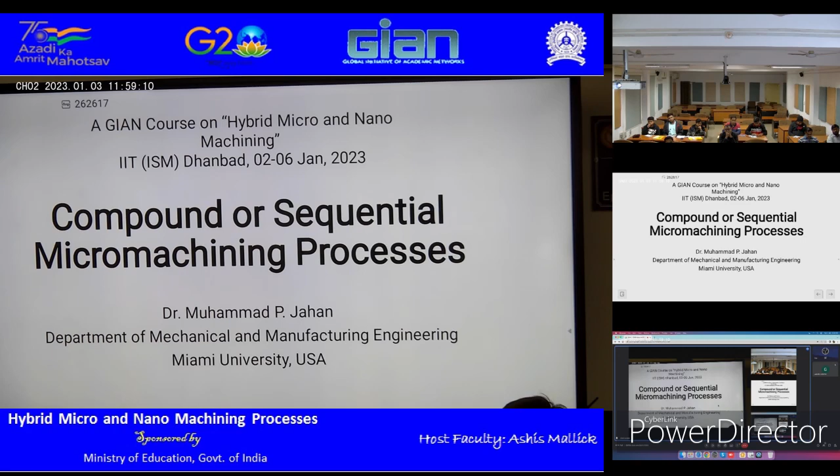I have actually created all the lecture slides from all my publications, or publications with my students and others. Those are actually book chapters. I've done some individual research on individual different processes, but most of those are book chapters. Since this is a course, collecting information from book chapters will help. So I will be happy to share all those book chapters with you. Those are already published, but I will also share the course materials.

Yeah, so let's move on.

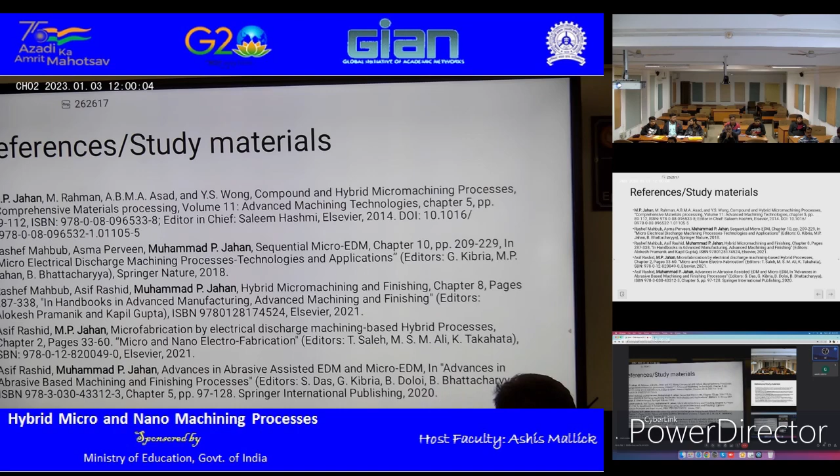Is it echoing a little bit? No, sir. Is it okay?

Okay, so in the contents, as I mentioned, we're going to cover about 15 different compound or sequential machining processes. Sequential means one process after another, and simultaneous means both processes are working together. So in today's lecture, we are going to cover sequential processes.

So we have micro EDM with micro turning, micro EDM with micro grinding, micro EDM with micro milling, micro drilling. All those are mechanical micro machining processes combined with micro EDM. Then we have micro EDM with some other non-traditional machining processes like micro EDM and micro ECM, LIGA and micro EDM, laser micro EDM, micro EDM with laser welding, then micro EDM milling and laser ablation.

Laser will work here, but this is also not working. No, this slide change is not working also, but it's okay. But yeah, you can work on that. But I can use this to continue, so should be okay.

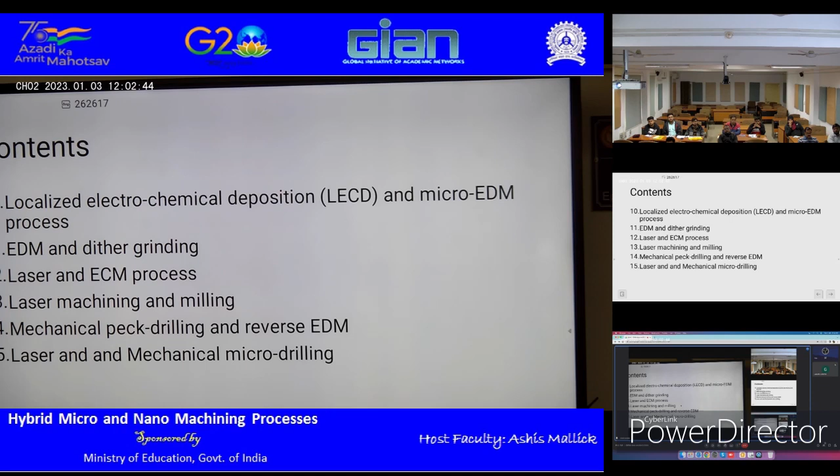So I don't know, how many of you are familiar with different machining processes? I just want to make sure so that I can know how much detail I have to go into.

Mechanical micromachining processes like micromilling, turning, drilling - all of you are familiar. What about micro EDM? Okay, so some of you may not be familiar with micro EDM. Let's try to spend a few minutes on micro EDM, because many of those processes have micro EDM. So what is micro EDM?

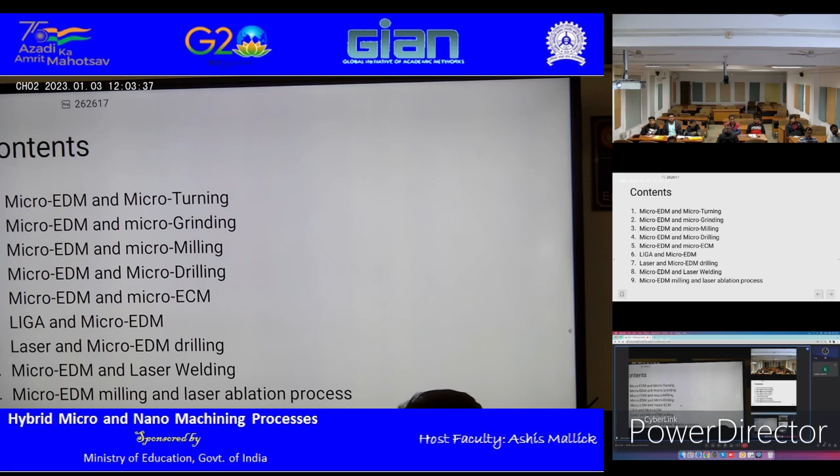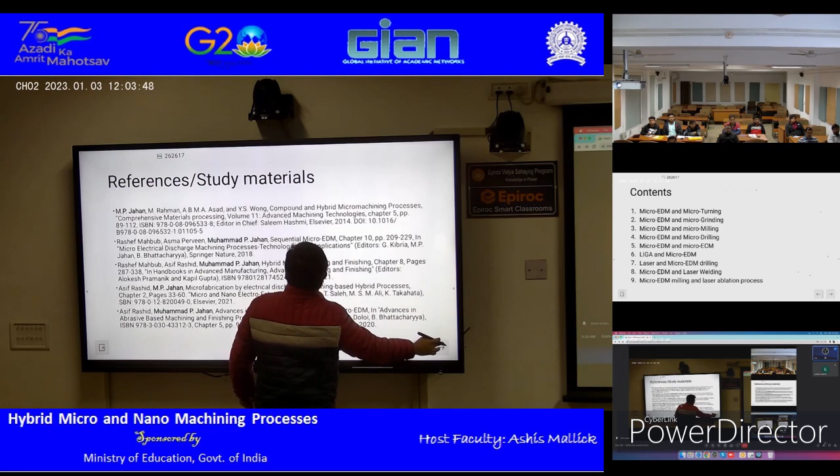Let's start with what is EDM. So let's start with what is EDM process?

So EDM stands for electrical discharge machining, or electro discharge machining, or electric discharge machining. People talk about it differently - sometimes electrical discharge machining, sometimes electro discharge machining or electric discharge machining, but it doesn't matter. Let's talk about EDM first.

EDM was actually invented during the Second World War, when the war was happening and there were lots of heavy things, and also some of the metals are very hard, and you need to remove those, you need to machine those. I think the inventor, I cannot remember on top of my head, but it's a Russian inventor - I think Lazarenko or something like that.

They came up with an idea of removing material with electrical sparks. So the material hardness doesn't play a role here. All you need to do is, for example, if this is a tool holder, then you will have a tool.

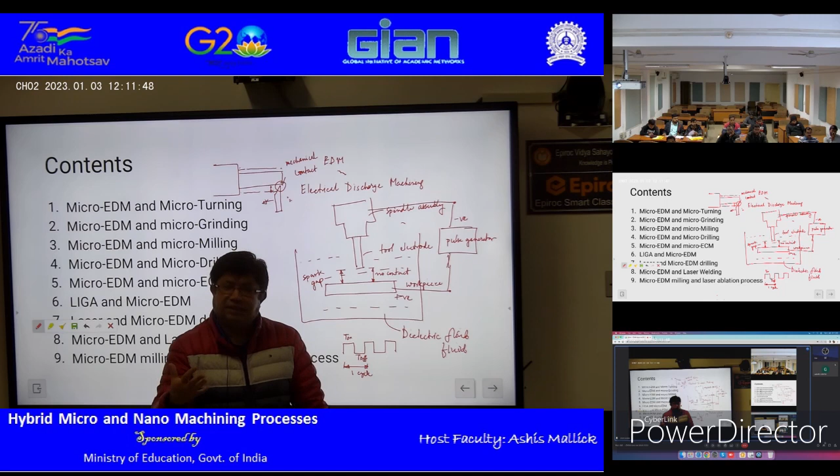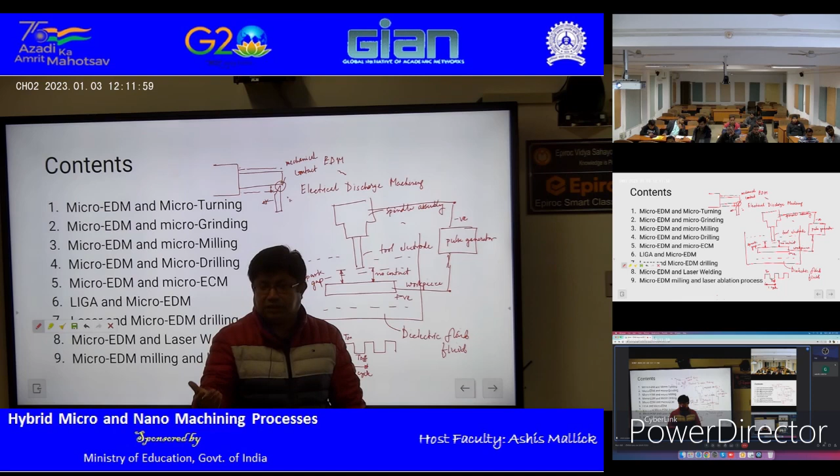Whereas here, there's no contact. That's the specialty of the EDM or micro EDM process - the tool never touches the workpiece. There is always a spark gap maintained between the tool and the workpiece. So it doesn't matter which one is harder - you can use a softer tool to machine a harder material. That's the main difference between EDM and conventional machining process.

Now let's talk about micro EDM. Yeah, let's talk a little bit about micro EDM.

Okay, yeah, then I can use this space.

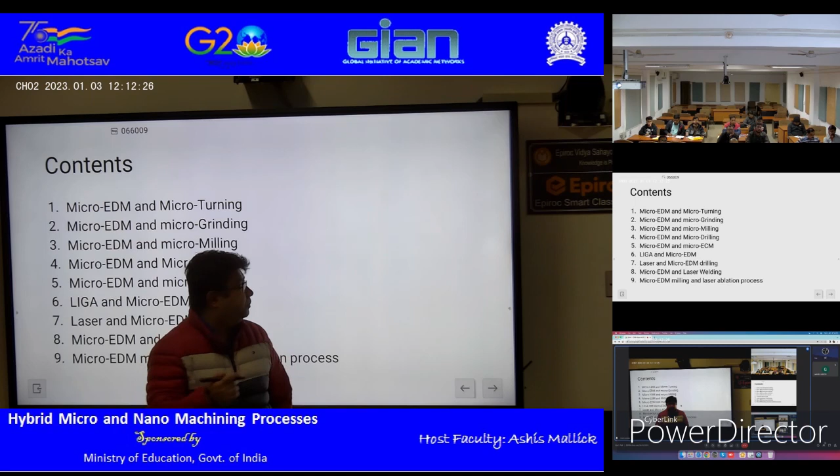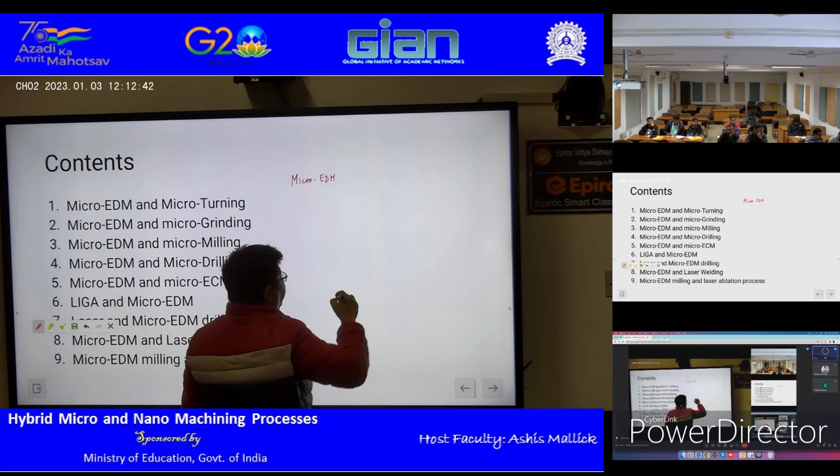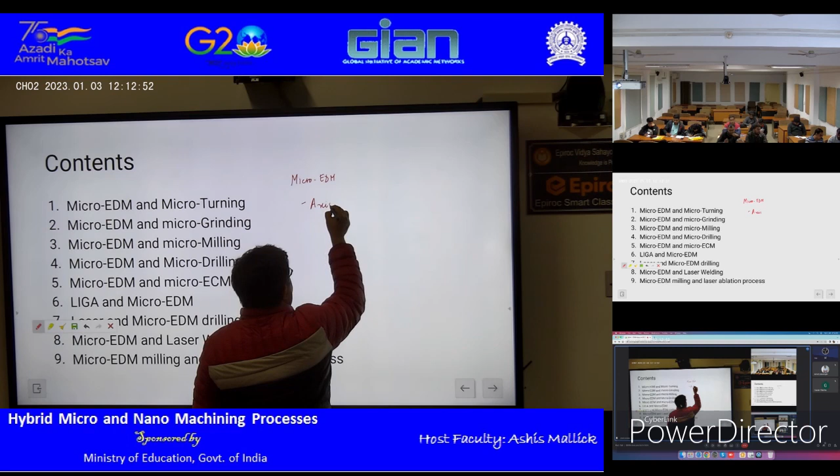So let's talk about micro EDM. Micro EDM is a miniaturized version of the EDM process. That means the axis resolution, tool size, and energy used are all in the micro scale, so you're talking about 1 to 999 microns. That means anything less than 1 millimeter is micro machining, micro scale machining. But remember, there are other differences also.

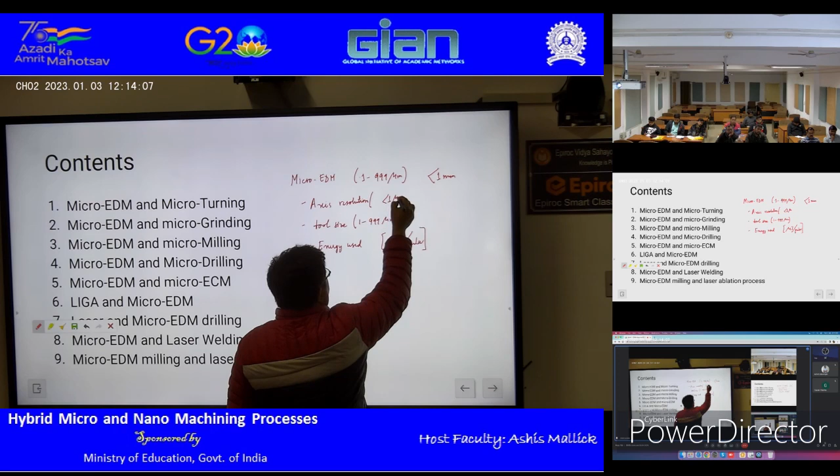It's not only the axis resolution or discharge energy. Discharge energy is in microjoules per pulse, so if you calculate the discharge energy, we'll talk about how to calculate that when we cover EDM. Tool size is 1 to 999 microns. Axis resolution is usually sub-micron, less than 1 micron, so the axis resolution is very small. Those are kind of the features of micro EDM compared to conventional EDM.

But there are other things that also play a role in micro EDM, so it's not just those. Micro EDM has become an independent process, and some of the characteristics are slightly different than the EDM process. But that's basically the micro EDM process.

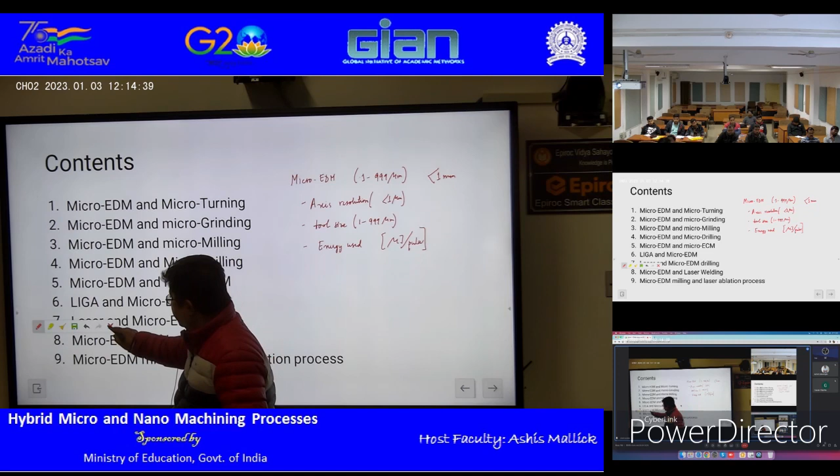So I think from there we can start covering a little bit more about different processes. Now you're a little more confident about EDM and micro EDM, and you already know the mechanical micro machining processes. So in this section, we're going to cover how micro EDM can be combined with some of the mechanical micro machining processes to solve some of the challenges faced in micro machining. Later, I'm going to cover the remaining processes, where you can combine almost any process with another to come up with new compound processes.

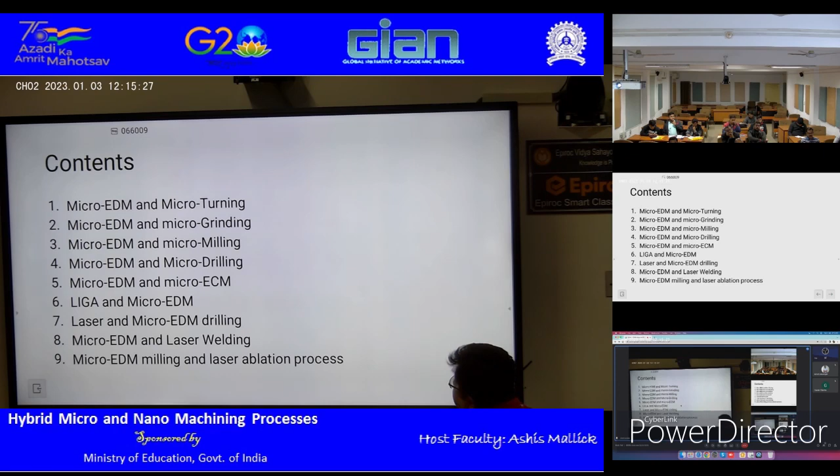So let's start with micro EDM and micro turning. I've arranged these in a very similar way. Although it's a little monotonous, I think it will help us think more in the same way for each process. First I'm going to cover why you need that process. Definitely, as I mentioned, all the sequential and hybrid processes come about not because people are just trying different things. It comes when you face a challenge and think about how to solve it. That's when you think about other processes that can actually solve this, and how you can combine two processes.

So, the micro turning process. The conventional turning process is a very well-established process. In your undergraduate machining course, you mostly spend time on the turning process. I teach manufacturing processes at the undergraduate level, so I know we cover most machining content on turning, then a little on other processes, because from turning you get the orthogonal cutting model, which applies to almost any machining process. When people started using micro turning, there was a lot of research to do, like modeling cutting forces, tool wear, and modeling microstructure changes.

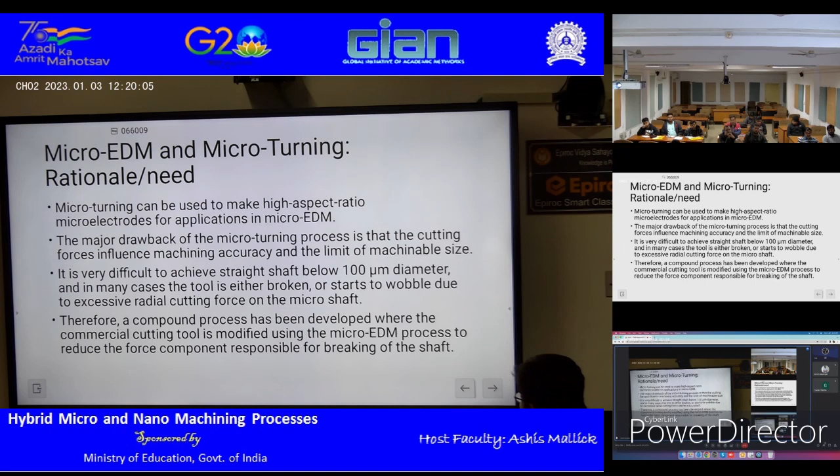If you look at a conventional cutting tool, usually if you use an insert, or maybe you just use a regular turning tool, any regular turning tool has a tool nose radius. So this is your tool nose radius.

Remember, we are using microturning and micro EDM in the same setup. So instead of horizontal turning, we use vertical microturning. That means we have a tool holder, and then we use a bar that we want to turn down to make the micro electrode. Then we use the microturning process.

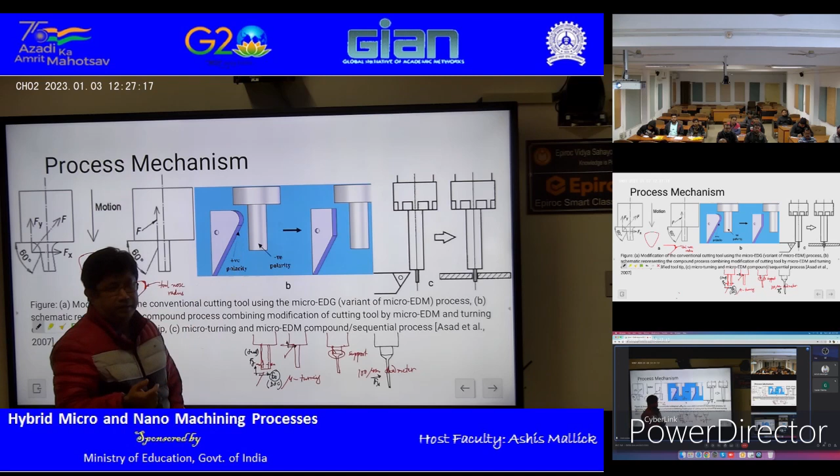So in the micro EDG, I use the tool as the workpiece because I want to remove more material from that tool—so it's just reversed. You can use micro EDG to do the dressing, because remember you will have Fx here and Fy here. So what I'm doing is trying to get rid of this section. Here I already got rid of that section, so I'm eliminating Fx and will have mostly Fy, okay?

That means you do the turning process up to 100 micron using this tool, and then you do the electrode dressing, and you start machining with this. So now you have your tool here.

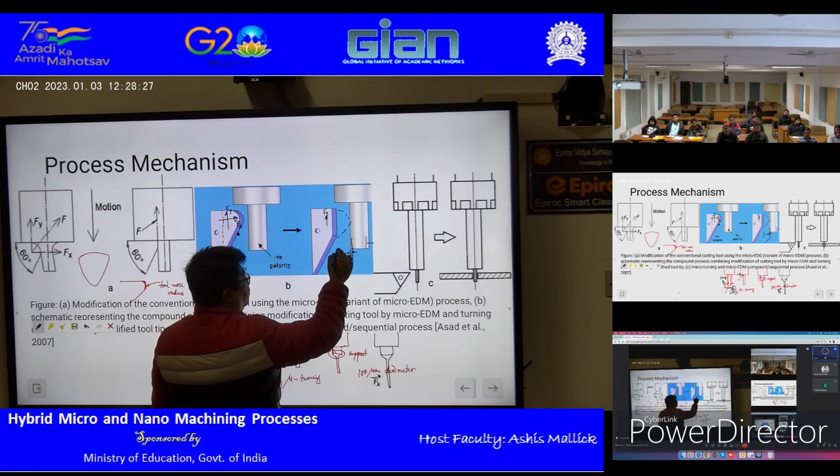So now you are trying to remove material using this, right? You try to get rid of material from both sides, and you try to move this. So you will have Fy, but you are getting rid of mostly Fx, and that will help you achieve up to 20 micron. Remember, our hair is about 70-80 micron, so you can achieve 20 micron without any bending.

Now we try to push the limit. After that, even Fy force can also bend that. So after that, we also used another process, which is block micro EDM—it's non-contacting, to bring it down to 5 micron or something like that. We'll talk more about that EDM process. But for micro EDM and turning, we'll just stop at that 20 micron, and then you have the electrode ready, and you bring it to the workpiece.

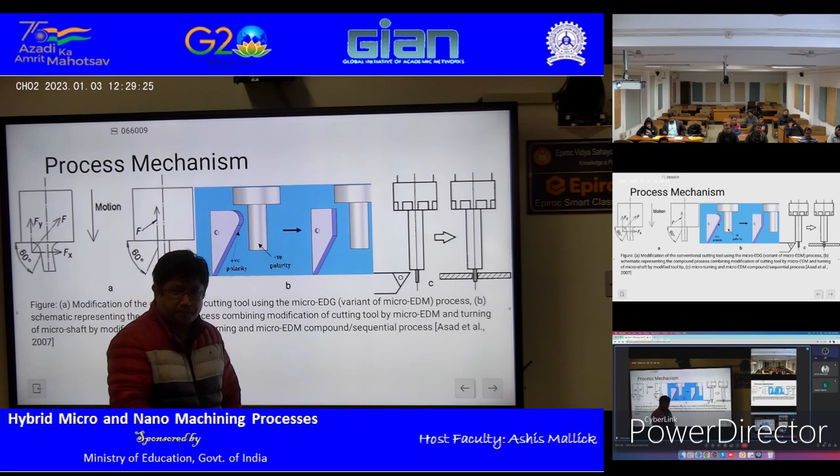Again, change the polarity, and you do the micro EDM drilling process. So that is kind of the process mechanism. Any question, anyone so far? Okay, so that's kind of the process mechanism.

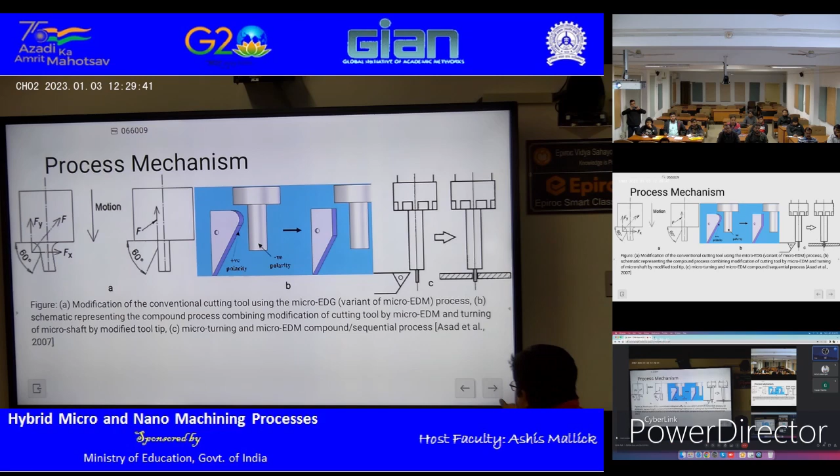Now, as I mentioned, you can see this is one of the electrodes, machined about 20—it was about 22 micron. The brass electrode was done by the micro turning process using the tool, and also then using the modified tool. Remember, the turning tool itself was modified by the micro EDM process also. So you are using micro EDM process for electrode fabrication and also for machining.

Now, how were we able to get 6.5 micron? Once you have that about 20 micron tool, the micro turning process with the modified tool has a limitation—the Fy force comes into play and tries to break it. So you can use a non-contact process again, which is block micro EDM, and we'll cover block micro EDM when I cover the micro EDM lecture. You can further bring down the tool to about 5 micron, because there's always some spark gap between the tool and the hole.

And that 5 micron tool, you should be able to machine about a 6.5 micron hole. Now, there is another process in micro EDM we call self-drilled hole—that means the hole you machine also causes some electrode wear, which reduces the tool electrode. So that means if you machine multiple times, your tool is getting shorter also, and that helps you achieve smaller holes.

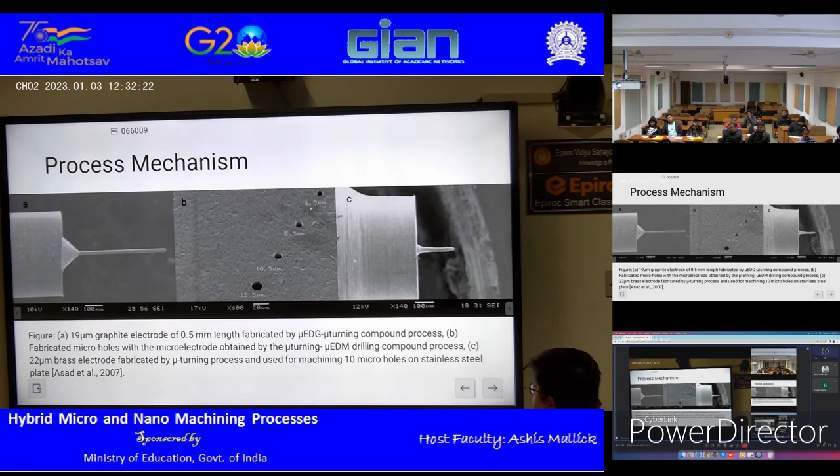So, the process capabilities—as I mentioned, using just regular micro turning, you can go up to 100 micron, with an aspect ratio maybe around... if it is 100 micron, then maybe you can go up to 3 millimeter or 5 millimeter or something like that.

After that, it will start to break or bend. Then what you do: you do micro turning with the regular tool up to 100 micron, then use a modified tool where you get rid of that FX component, and you can go down to 20 micron. After that, you need to use the block micro EDM process.

So block micro EDM, I can probably briefly show the process here. Some of you may know, block micro EDM is kind of, again, I would say micro EDM turning. So we use a block. For example, this is the block, we call it a sacrificial block.

Sacrificial block. And then you have that tool with the tool holder. This is probably too much, I am trying to remove at one step, but just consider. So this will work as the depth of cut for the EDM, right?

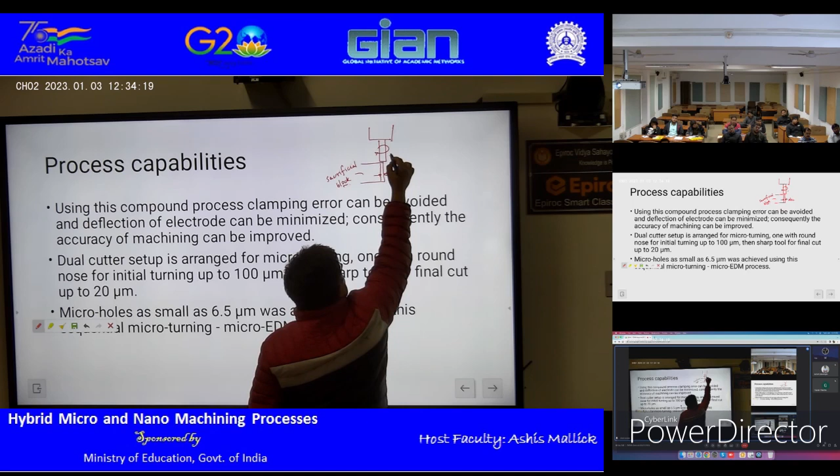And the same way that you did the turning with the modified tool, you are actually rotating this, and you are changing the polarity. So this is your positive, this is the negative, so that more material is removed from the positive side, right? That's my workpiece. And then you just do the turning process, bring it down. But this time there is no contact, because this is the EDM process, there is no contact, so the tool electrode will not break.

But still, there are some electromagnetic forces during the EDM process. If you go down more into the sparking phenomena, there are... sorry, what I mentioned - yeah, so there are some electromagnetic forces that can also limit, but you can go up to 5 micron, 10 micron if you do the block micro EDM process. So this is your block micro EDM process that you can use.

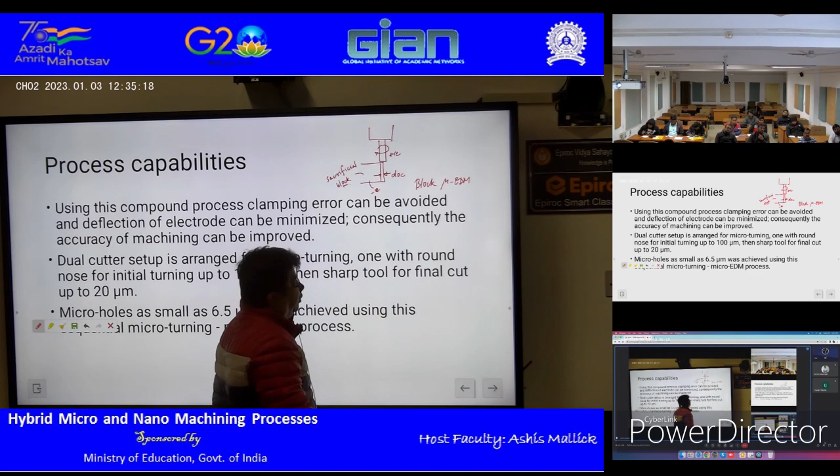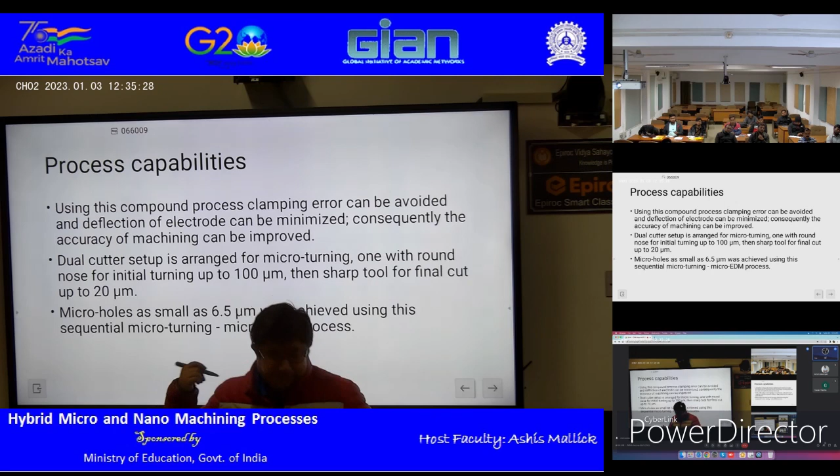I went a little bit deep, more in depth for that. So using that combination - you have turning, micro turning with modified tool, block EDM - you can actually achieve micro-holes as small as 6.5 micron.

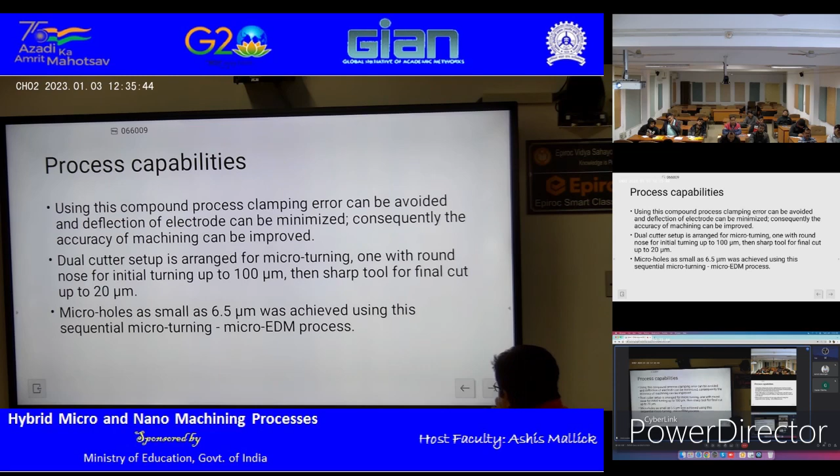Now, challenges. Spindle runout is a very big challenge. You are trying to achieve 5 micron, and when you start with the 3 millimeter or 5 millimeter tool, initially the spindle runout error is maybe 5 micron. But definitely when you start to do the micro turning, and if you don't take out that tool for the entire process, it will allow you to go up to that 5 micron, 10 micron level. So it can really go there.

So now the challenges are cutting forces, spindle runout, then the modified tool itself, then the 6.5 micron hole we machined - but I remember the aspect ratio was very small, because in order to machine a deeper hole, you need higher aspect ratio tools. So higher aspect ratio tools with a smaller diameter is again a challenge, and more research can be done in this area.

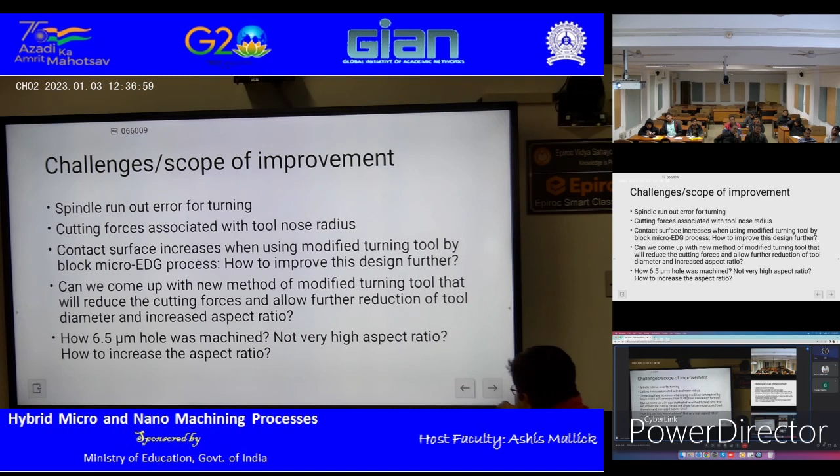So this is one of the processes, but I think the next one will go a little bit faster, because it's very similar. So now let's talk about the micro grinding process - micro EDM and micro grinding process.

So the rationale: in the traditional grinding process, what we have are grinding wheels, right? We have grinding wheels where the abrasive particles are actually connected with the metal matrix. And then you can use that as a grinding wheel.

For micro grinding, it's kind of a little bit different from micro milling, but it works in the same way. So for the micro grinding tool, you have something very similar to a milling tool. So you have the milling tool, and then at the end of that milling tool, you have this portion for the grinding. So this is kind of the grinding wheel, okay, so micro...

So, micro grinding wheel. You use a grinding wheel at the end of the tool. It kind of works like milling, but you can use that as a grinding process.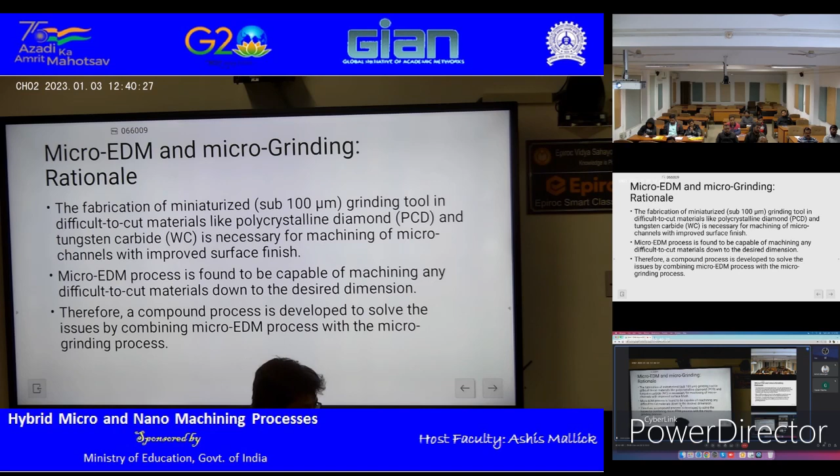There has been some research on that, and I have done some research on this as well with one of my colleagues, Asma Perveen. She's a faculty member at Nazarbayev University now. I remember we did some work on the micro grinding process.

Now let's talk about the process mechanism. You start with a commercial micro grinding tool. This is a micro grinding tool - it has a tungsten carbide base, and the black portion is the grinding wheel, where you have polycrystalline diamond with some nickel binder, or sometimes tungsten carbide binder. So this is your micro grinding wheel.

Now, if you want to use the grinding directly, this surface - the micro grinding surface - is just too smooth. This is the micro grinding wheel. Sometimes when they prepare it, all those diamond particles are not protruded, they're covered by the metal matrix, so it is very too smooth.

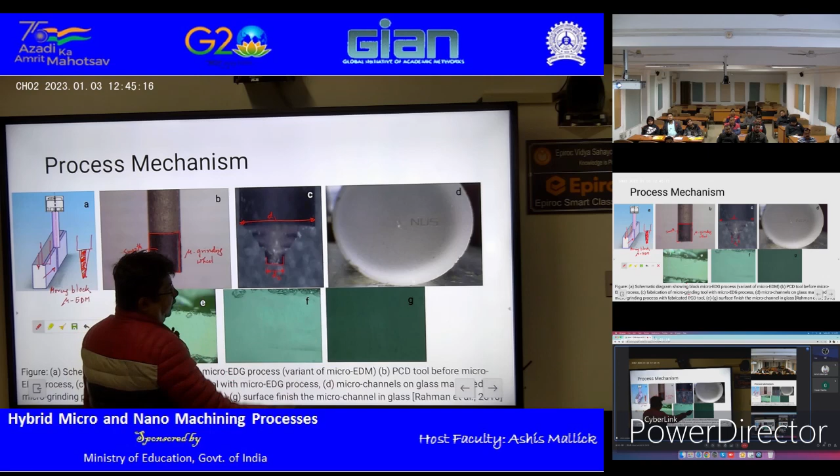Just like glass structure. Now here you can see the surface finish, definitely a very mirror surface finish that you can achieve.

Okay, so this is the process mechanism for micro EDM and micro grinding. Now let's go through how the process mechanism works.

Remember, the grinding wheel is made of diamond particles, and then it has nickel as a binder, or sometimes the top portion is tungsten carbide tool. Sometimes you can just use the same tungsten carbide as a matrix. Diamond particles are non-conductive electrically, so that when you machine it, there is no machining happening on the diamond particles, but the nickel binder material is removed from the tool.

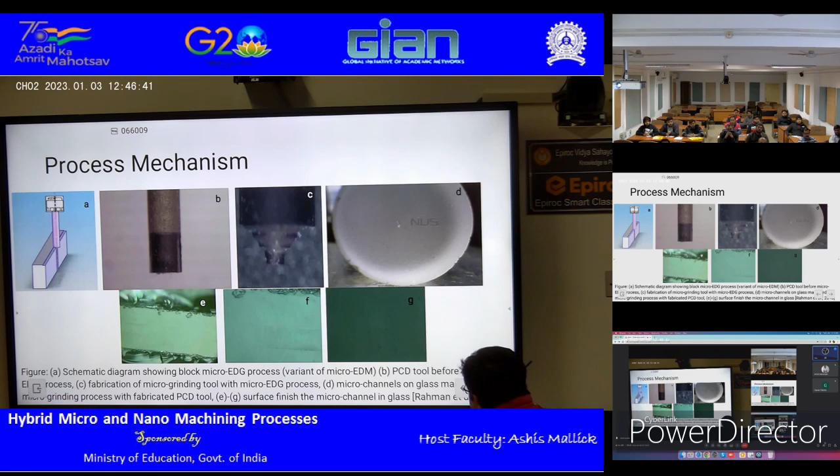So what happens? The diamond particles actually protrude, right? It becomes more protruded, and then when you do the grinding, those diamond particles are playing a role in the grinding operation. Okay, so that's how the process mechanism works. I think I explained that here.

Now I'm going to show several papers. It is not only our group that worked on this process - other researchers also worked on these processes. So you can actually be innovative, right? You can use the micro EDM process or micro wire EDG process. For the previous one we used block EDM process.

This author, I think he was at University of Kentucky at that time, used a micro EDG process to bring the tool diameter down - the tool tip is about 5 micron, and all the protruding things are diamond particles. Then you can use those to machine or do the grinding process.

This one is very similar to what we did, but it brings down the diameter from about 50, maybe 60-70 micron, and then you can do the micro channel.

One application can be microfluidics, right? You use micro milling for microfluidic applications, but the channel surface finish would definitely be much better if you use this process, because it's a grinding process rather than a milling process. Remember, in milling you are cutting from the side, but in grinding you are cutting both from the side and from the bottom.

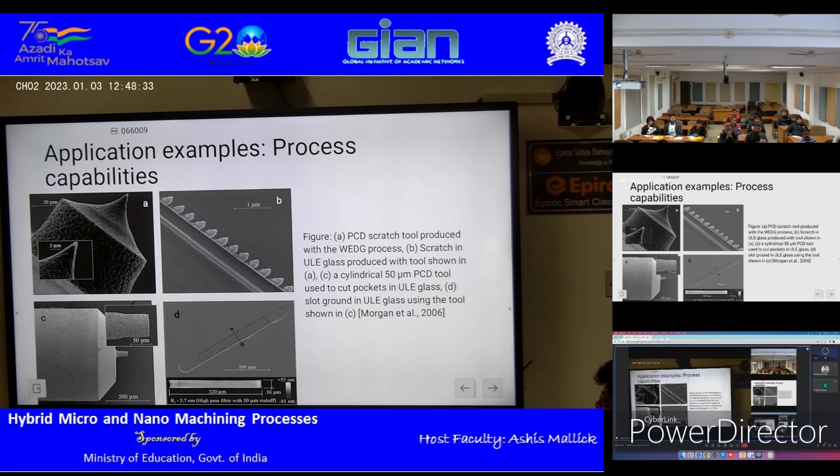Any question? Okay, so definitely you can use this process for microfluidic applications. I worked on this with my colleague, Dr. Asma Perveen. As I mentioned, you can be innovative and try to come up with different shapes of tools and see the grinding performance.

So we designed a fixture so that it's easy for the block micro EDM. It's not a simple block only - it has different angles so that when we do the block micro EDM, it is easy to get some of those shapes. We made circular, triangle, rectangular, D shape, and conical shapes of the grinding tool. All of those are grinding, and you are doing the machining on that grinding wheel portion.

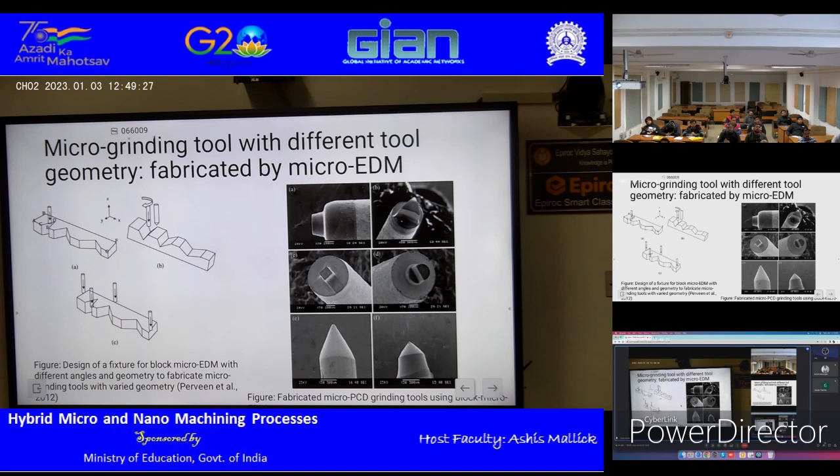And then you can use that for different applications and see what happened to the cutting forces and surface finish. We found that the D shape grinding wheel actually performs slightly better than other grinding wheels. We just made some channels, didn't try complicated shapes, but for regular things, I think the D-shaped tools work better than other tools.

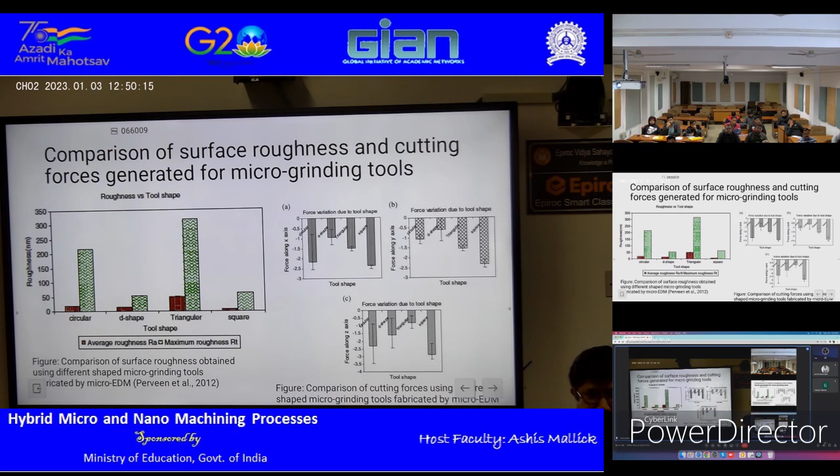So again, this is just a variation of the process, but the basic mechanism is the same - you are combining micro grinding and micro EDM process to achieve some goals.

Challenges - one challenge is, remember, you are removing the binder materials, so some of the diamond particles may loosen, and when you are machining they can come out. That's a challenge, especially when you try to go too small - one author tried to get a very sharp 5 micron tip. Sometimes the particles loosen, and if the particles are not there, what's happening is rubbing of metal matrix instead of grinding.

You have those fine abrasives that do the grinding process, but if the fine particles are not there, you are just using a metal piece - it's kind of a rubbing action mostly. So that is something with scope for improvement.

And also, all those processes have a lot of things still to do. As I mentioned in the last class, before the trend for additive came, micro and nano machining was the trend, but it didn't reach maturity, and then additive came and took its place. So there are a lot of things still to be done in those areas.

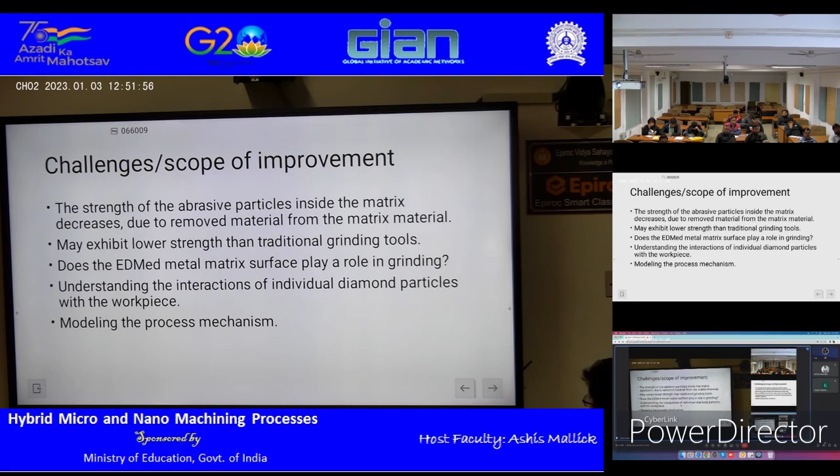Micro-EDM and micro-milling tools are fabricated similarly. As I mentioned with the micro-grinding tool, you fabricate the tool just like the micro-milling tool. Now, why do you need that?

Micro-milling has made lots of advances. There are micro-milling tools available down to 20 micron. So if you need it, micro-milling has advanced a lot and you can go up to 20 micron. But consider, if your micro-milling tool is limited to 50 micron only, and you want to go to 5 to 10 micron for micro channels, how can you do that?

Because commercial micro-milling tools at that scale are not available, you can use the micro-EDM process, or micro wire EDG, or block micro-EDM process, to produce micro tools from difficult-to-cut material like tungsten carbide, and then use that as a micro-milling tool to make micro channels.

But remember, when making the micro-milling tool, you need to ensure a shearing action is taking place, not rubbing action — otherwise it's not doing milling operations. It can also get rid of error due to clamping. Even if you have run-out in your spindle when you put in the micro-milling tool, when you prepare the milling tool in situ, you get rid of that spindle run-out error. So that's another advantage of combining micro-milling with micro-EDM over the traditional micro-milling process alone.

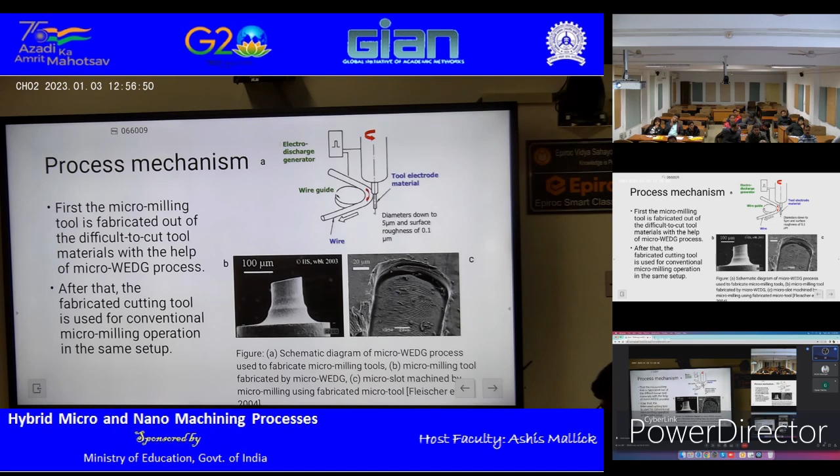So you can use micro wire EDG and bring the diameter down to 5 micron, which is very difficult to obtain using block micro-EDM, but wire EDG can give you 5 micron with about 0.1 micron surface finish on the milling tool. You can see some shearing marks on the milling tool, and also some plowing — remember, in milling there's always some rubbing and plowing, but shearing action should dominate for it to be called a milling process.

This is research from another researcher, Morgan et al. They also use a similar tool, but the tool needs different angles — rake angle, clearance angle — so it performs a shearing process rather than rubbing. If you just use a regular cylindrical tool to machine it, it will only rub, not shear. So you can machine the milling tool, and then use that machined milling tool made via micro-EDM or micro wire EDG.

Then you can use that for the milling process in situ. There are some benefits, but it really depends on your application and how small it is. For example, if you're trying to achieve a very small dimension using a 20 micron tool, and your spindle runout is 5 micron, it will be very difficult to achieve that 20 micron. So you can try to machine the tool yourself in situ, which would get rid of any spindle runout effect on that portion, and then use that for micro milling. It can give you nano scale surface finish too.

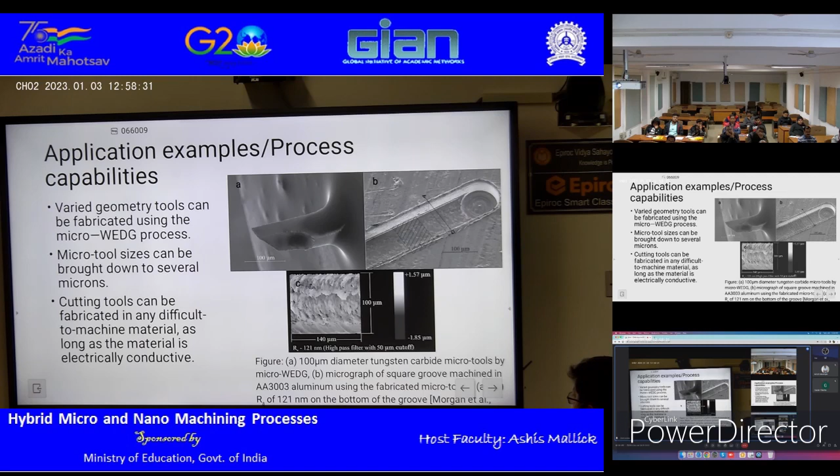So the most important challenge is geometry. The milling tool has lots of geometry, so it's very difficult to obtain such geometry using EDM, block EDM, or wire EDM. If it's 5-axis wire EDM, you'd probably get some geometry, but most wire EDM machines aren't 5-axis, so there's limitation in creating geometry. That's why most pictures show only very simple geometry being machined, which is a future research direction.

I put some challenges and scope for improvement to initiate your thinking. I'm an EDM person, but I won't claim that a tool made by EDM will be stronger than a milling tool. Milling tools are mostly powder metallurgy and very strong. With EDM you introduce a recast layer on the tool surface, so it may not withstand very high cutting forces. So it's another thing to work on. It may be suitable for softer materials, polymers, composites, or soft metals, and that's how most research has been done. But it's good if you want to achieve a dimension where tools aren't available, or spindle runout is causing problems and you want very high accuracy - then you can go with this process.

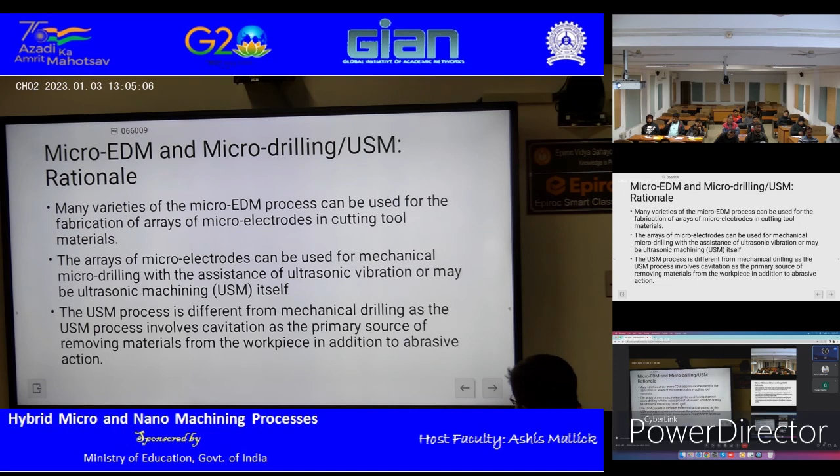So this is just a single step. If you consider a single step, you use the wire EDG to bring down the electrode diameter to the shape that you want.

We have already discussed the wire EDG process and block EDM process, but there are some other processes for electrode fabrication that we'll cover in EDM. Here, in the wire EDG process, there is a wire guide.

If you remember, we showed here, you have this wire guide maybe here. So this is a wire guide, then you have the wire running like that. This is wire — remember, it is continuously running, so that the wear happening in the wire material doesn't really affect the process.

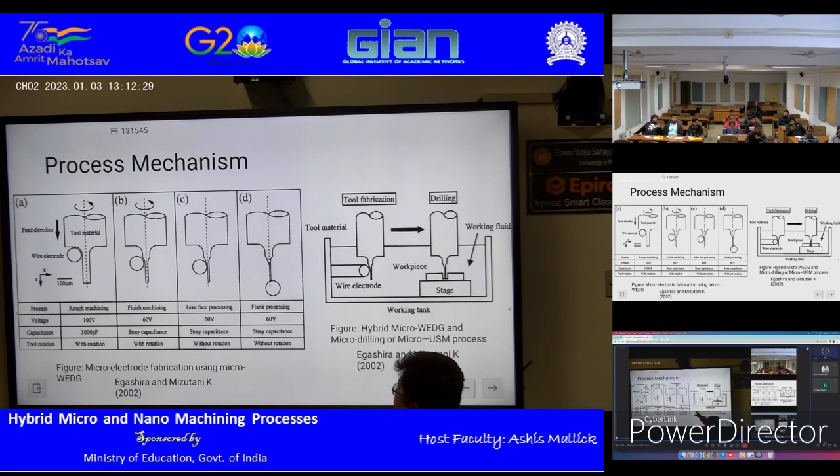Now, what they did, they made some modification when they machined the electrode. In the support portion, they had a slight rake angle there. This is just for ease of machining. During ultrasonic machining, that portion will probably cause some mechanical machining also.

So then they used this tool to machine brittle material, silicon. As I mentioned, ultrasonic machining is mostly happening in glass, silicon, ceramic, and those kinds of brittle materials. So if you want to do contact drilling, it's not possible. But in ultrasonic machining, the main mechanism is cavitation, and cavitation can even chip up the materials. You can see some brittle chipping at the edge because of cavitation-induced chipping. But abrasive also kind of helps to smoothen, or acts as a secondary source of material removal.

Now, how can you commercialize this? In industry they are already doing that. As I mentioned, I'm working with Bullen Ultrasonics on one project, and they're exactly doing that - using the EDM process to make those electrodes. There are several EDM processes and other processes. A simple process is the micro-EDM process itself, which you can use to make the electrode, to make the hole, and then you can use reverse micro-EDM also to get the arrays of electrode.

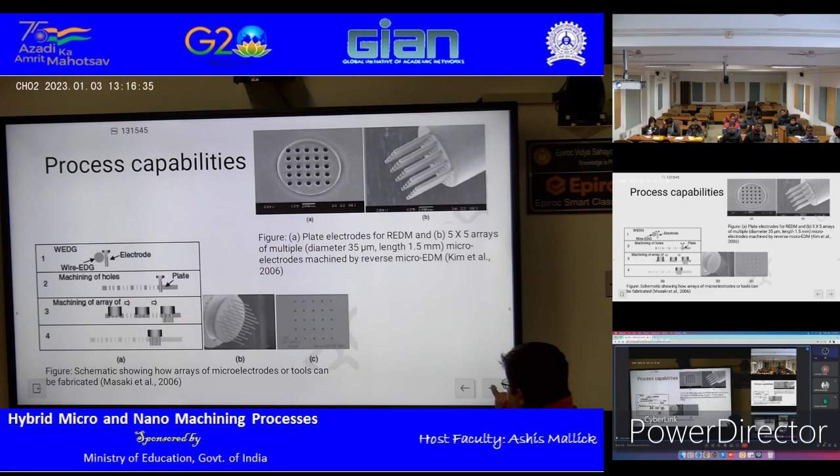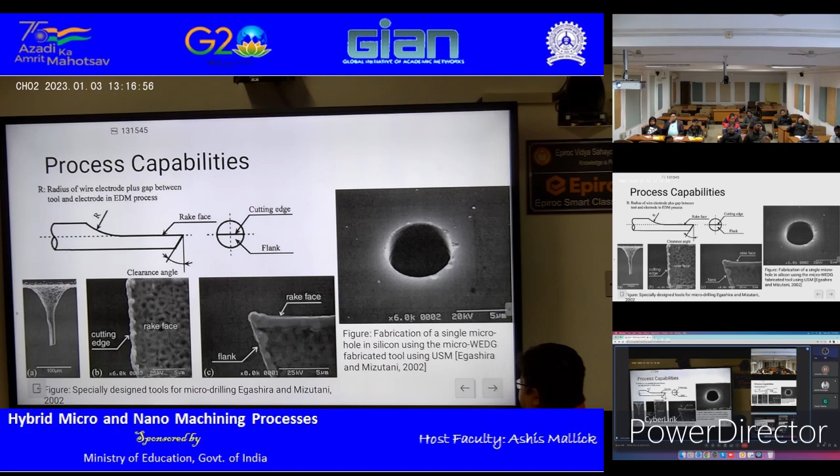Some challenges - mechanical drilling is very difficult, but you can try different geometry. One author showed that you can make some rake angle or rake face and flank face, which may help in mechanical drilling, but it's still very challenging. The tools themselves are not very strong, and there's some recast layer associated with that. When you do ultrasonic machining, those recast layers can cause wear on the tool itself, because the cavitation that removes material from glass will also remove material from the metal tools.

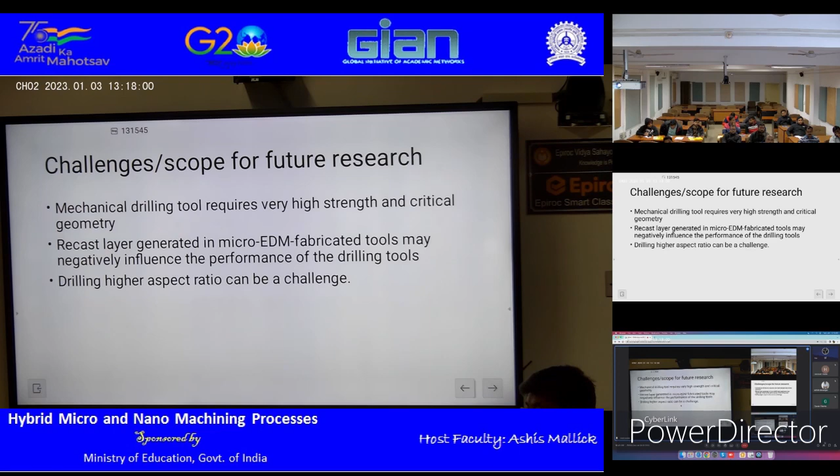But drilling at higher aspect ratio is always a challenge. In this area, you can always push further - how small you can go, and how high an aspect ratio you can achieve. Even additive manufacturing has a major issue here - they cannot really make those internal holes and drills. So in order to make those internal holes and features, even additive parts need to come to machining. This is definitely a very good area for future improvement.

There are lots of processes to make electrodes using micro EDM, and I haven't covered those in my compound processes - I hope to cover some when I'm covering micro EDM. But those processes are also compound processes where you use different types of micro EDM one after another - some for making the electrodes, and some for making the real or final parts. So I'm going to stop here, and in the next section I'll cover some other sequential processes. Thank you, everyone.